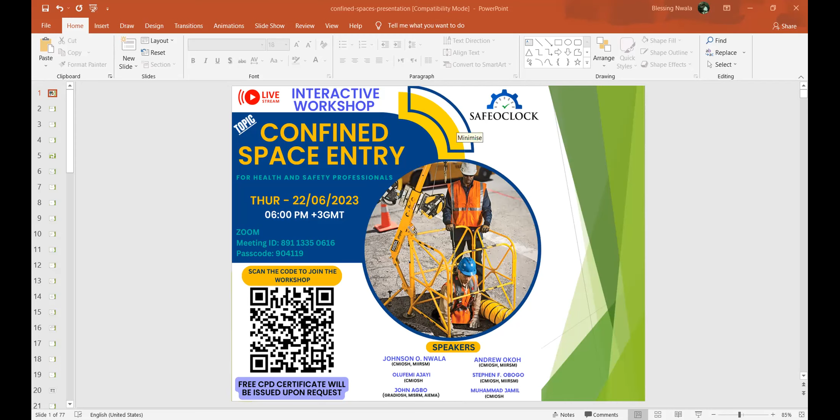All right, we are starting. I think everyone here knows me, my name is Johnson Nwala, and I'll be coordinating the discussion today. Like we all know, our topic today is confined space entry. So we'll be talking about confined space entry, and everyone will contribute.

I'll just introduce the topic in about 5 to 10 minutes, then I'll give the opportunity for others to contribute and give their own knowledge or ask questions so that we all learn together. So it's not a forum where someone knows it all. Nobody knows it all, so that is why we are here today.

All right, so confined space entry. Different people have different definitions for this, but majorly we have 3 major criteria for identifying a space as confined space. One is that it's large enough or configured for an employee to enter, and it has limited opening for entry and exit, and is not designed for continuous occupancy, meaning it's not designed for somebody to stay there for a long time. So these are the major criteria for defining a confined space.

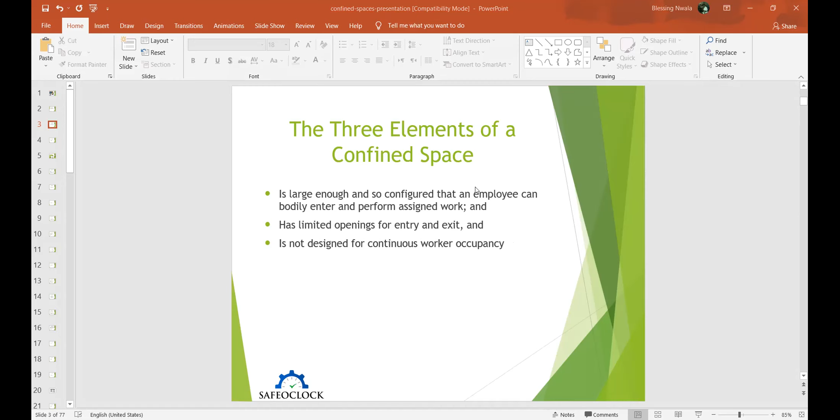All right, these are typical examples of a confined space: boilers, furnace, pipe, manhole, sewage, septic tanks, trenches. So these are all examples. Depending on the industry where you work, you will have a lot of examples and different scenarios. Those in the construction industry will be more conversant with manholes, you'll be more conversant with shafts. So these are examples of confined space.

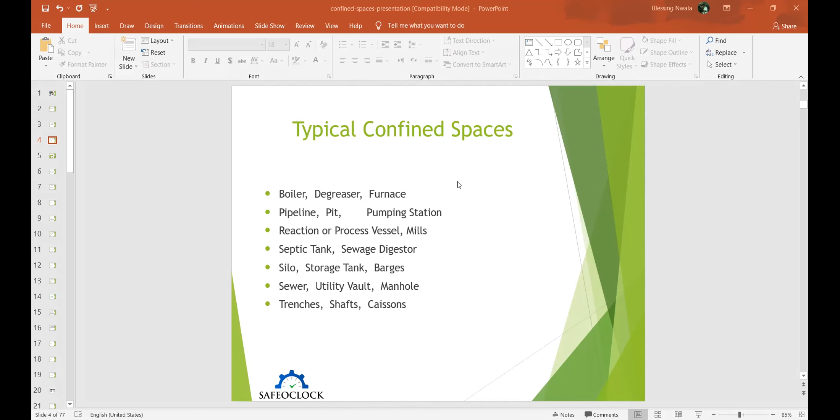If it has limited access to entry, it's not designed to stay for a long time, and the exit and entries are limited, you can classify it as confined space. Now, in categorizing confined space, I hope you can see my screen, right? Yes, yes, all right.

So in categorizing confined space into permit required or non-permit required confined space, you have to take note if the space is large enough to enter, there is limited or restricted entry, and if that space is not designed for continuous worker occupancy, then it's a confined space.

Now, for you to determine if a permit is required, either of these or all these criteria should be available. Like if the environment is hazardous, if there is hazardous atmosphere, if there is possibility of engulfment, there are configuration hazards, like there could be overflow or there could be drowning, and there are other recognized hazards, like oxygen deficiency or over-enrichment. So if these hazards are present, then permit to work is required, so it's a permit confined space, okay.

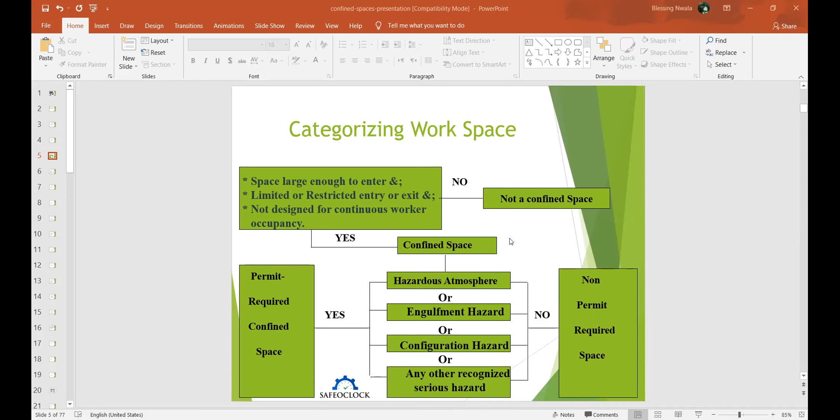We can hear from you and know how you implement permit to work in a confined space. All right, so what makes a confined space limited access?

If the opening is like 18 inches in diameter, or if there is difficulty of entry with self-contained breathing apparatus. Also, if it's very difficult for you to remove people from the confined space, maybe in the event of emergency, if it's difficult to remove people, then you know that there is limited entry, it's a limited entry space.

If there is difficulty for people to bend, somebody working inside there, if it's difficult for him to bend down to do his work, then there is limited exit and entry. So these are checks, criteria that you can use to check if this space has limited opening, if it has limited entry or exit.

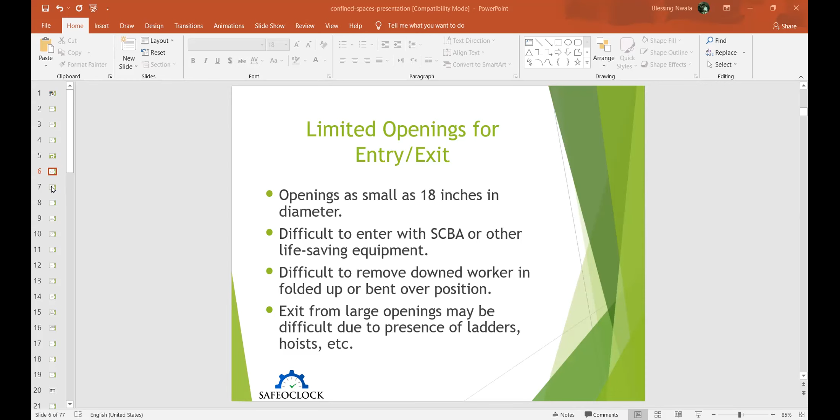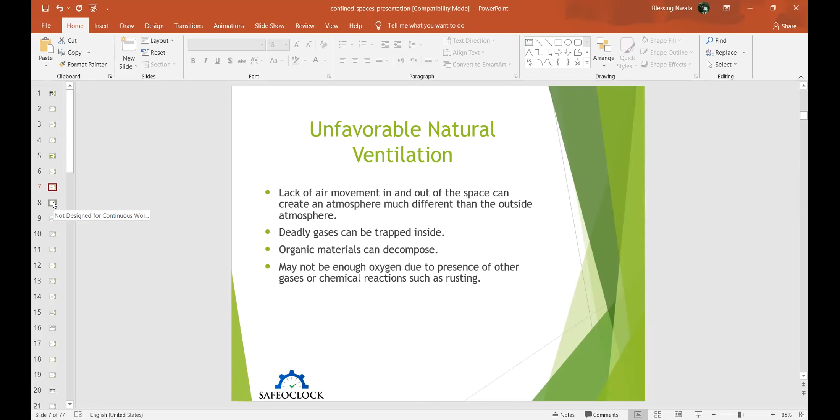How do you now check if the environment is unfavorable? If there is lack of air movement and if there are decomposed organic materials, you can say that this is an unfavorable environment. So what we are looking at now are checks, points that you look at to conclude if this confined space requires a permit to enter.

How do you now confirm if the place is not designed for continuous occupancy? If there is equipment stored inside that location, if the location is meant for repair or maintenance activity, then you know it's not designed for continuous occupancy. It's for temporary activities, just for maintenance. There is equipment stored there, and it's used for storing materials, maybe it's a tank. So it simply means it's not designed for human continuous occupancy, so it's a confined space and it requires a permit to enter. These are the points that you use to check.

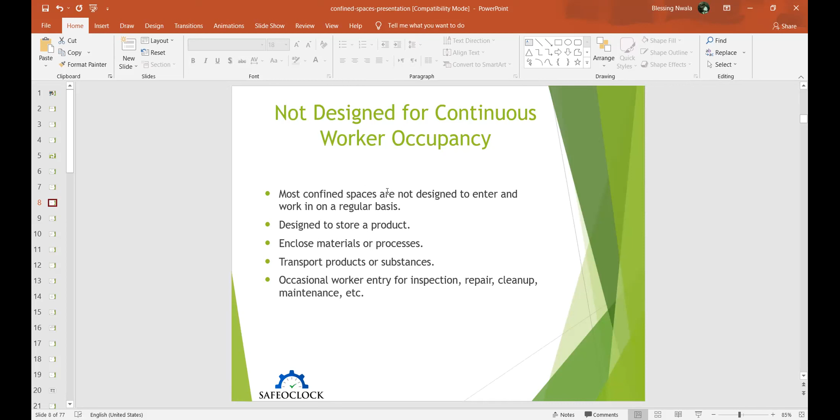Another point you use to check is if there are dangerous combinations, like if there is presence of all the characteristics of a confined space, and if there is possibility of complication during rescue operation. If the activity going on there involves welding, hot work, or use of gases or hazardous substances, then you know the environment is dangerous. There's a dangerous combination, so there is need for a permit to work.

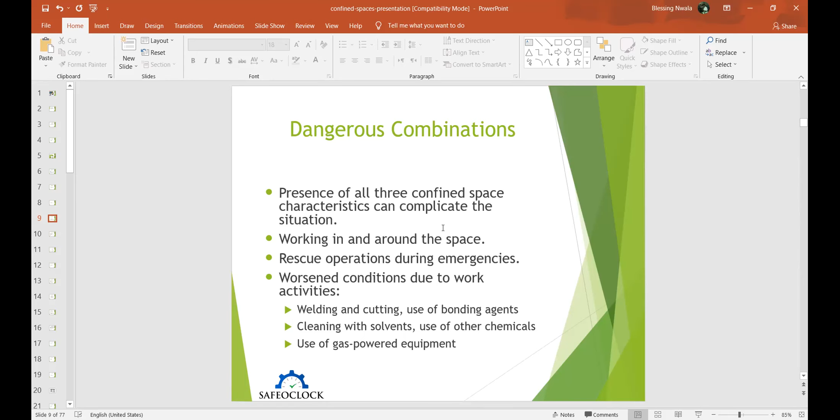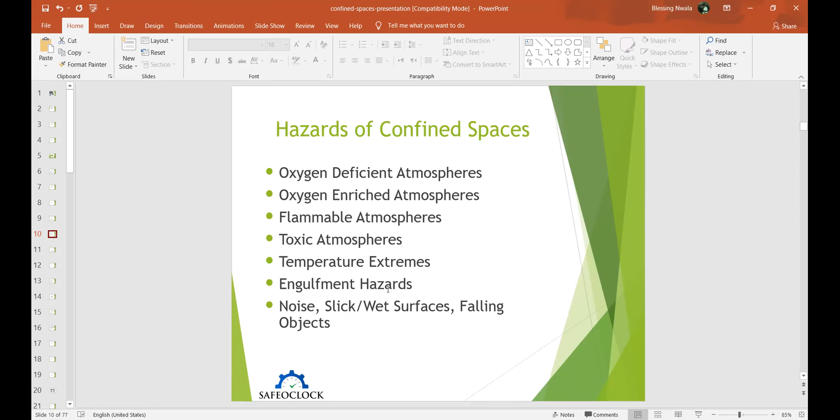These are some hazards that we'll find in confined spaces: oxygen deficiency, oxygen enrichment, flammable atmosphere, toxic atmosphere, extreme temperatures, either extreme cold or extreme hot, engulfment hazards, and noise.

What do we mean by oxygen deficient environment? If inside the confined space the oxygen is below 19.5%, then we know that environment is deficient of oxygen. So it's hazardous, it's a confined space and it's a hazardous environment.

If the oxygen level is above 21%, of course you are going to do gas testing, so we'll come to that. But if you do your monitoring, your gas testing, and you find out that the oxygen level is above 21%, then it means that confined space is oxygen enriched. It simply means the oxygen level is very high and there's possibility of fire outbreak inside there.

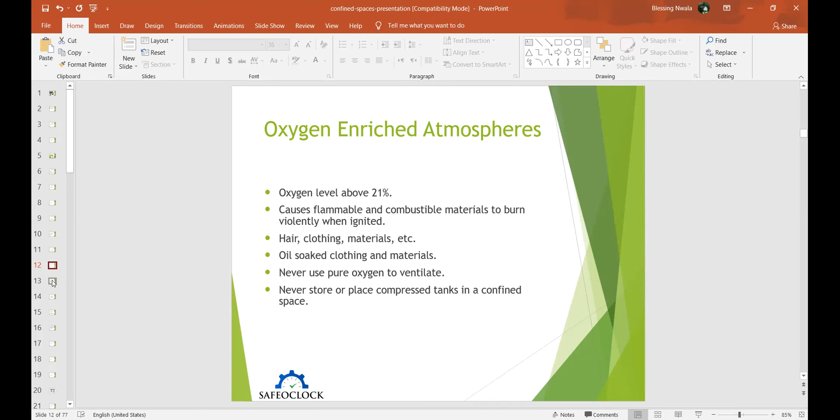Now, flammable atmosphere: if there is presence of flammable gases, if there is smoking, if there are welding operations going on inside there, then it's a flammable atmosphere.

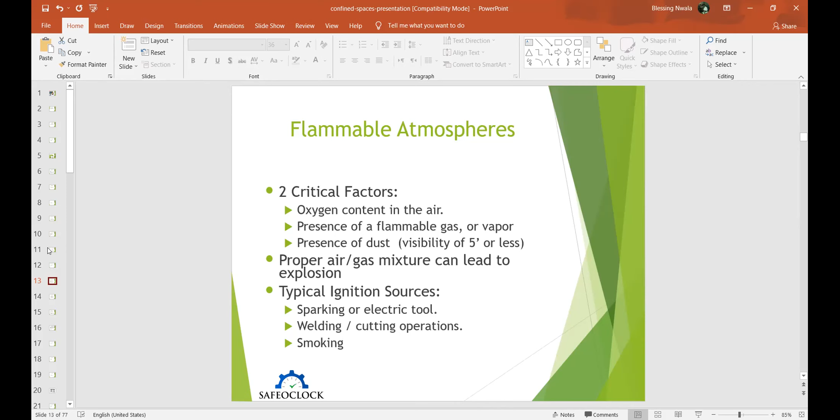Toxic atmosphere: if gases are released, if there are decomposed materials, these are all toxic atmosphere, and adequate control measures should be in place.

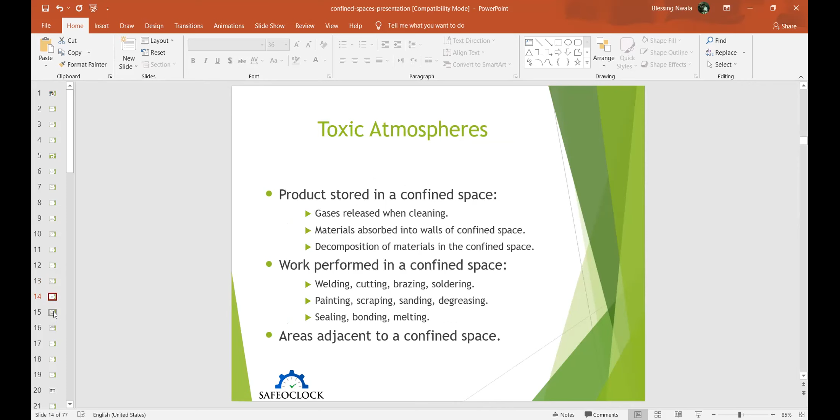If there is a presence of hydrogen sulfide, which comes from decomposed human waste and smells like a rotten egg, there is possibility of no warning at high concentration. So if hydrogen sulfide is present in the confined space, it's a hazardous atmosphere.

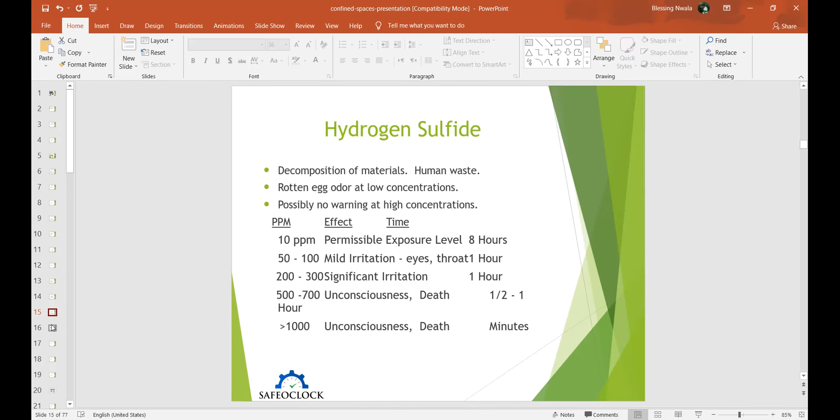Carbon monoxide: if carbon monoxide is available in the confined space, then it's very, very hazardous.

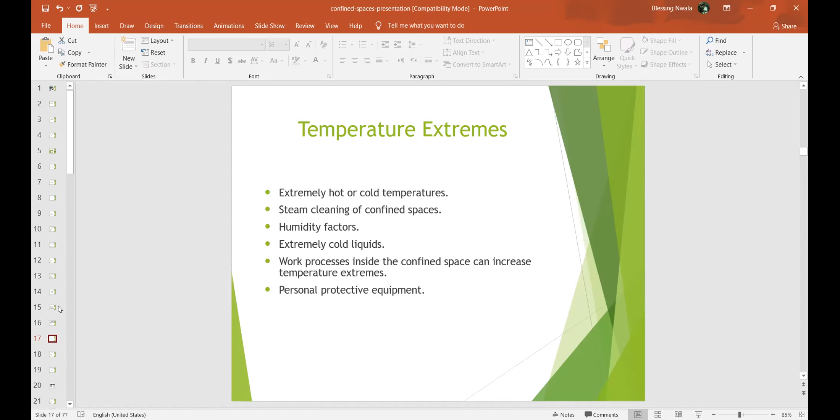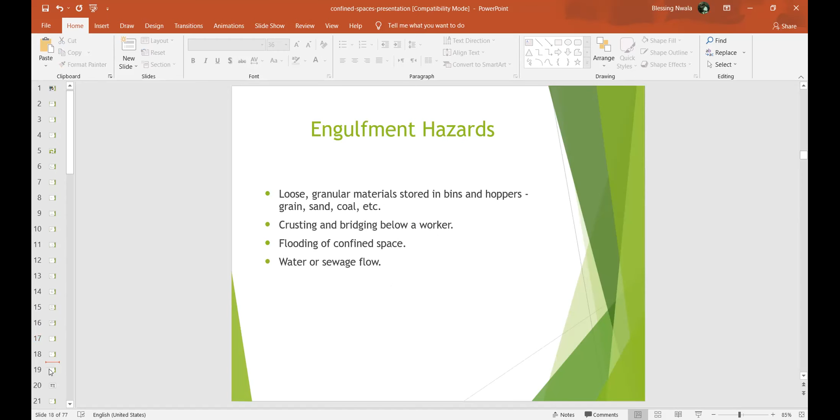We talked about extreme temperature before. Engulfment hazards: if there are loose soils, or maybe there is a possibility of flooding, or there is a sewage or sewer flow, then that is an engulfment hazard in confined space. Noise, falling objects, these are all hazards in confined space.

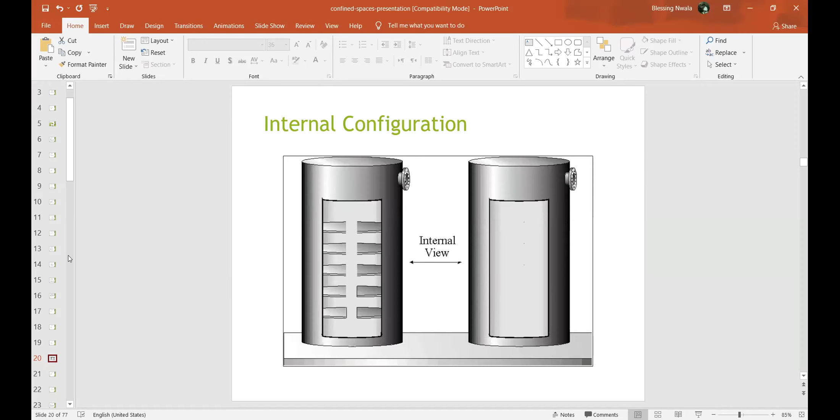What you see on your screen is a typical example of a confined space where you see there is limited space to enter and there is limited exit.

Before you start any activity in the confined space, there must be testing. You must test the environment, and testing must be done by a competent person, an authorized gas tester, who conducts the testing in the confined space. While testing the confined space, he must test the top, the middle, and the bottom of the confined space.

The reason is different gases settle at different levels. Methane is lighter than air, so you are likely to see it at the top. Carbon monoxide is at the same level as the air. Hydrogen sulfide is heavier than air, so you are likely to see it at the bottom.

While conducting gas testing, the authorized person must conduct the gas testing properly. If not, he might conclude that the confined space is safe, whereas at some point it becomes unsafe. That is why in most cases they use the tube type, inserted in the confined space, which gets you the reading at the top level, the middle level, and the bottom level, so that you'll be able to conclude that the entire levels of the confined space is safe before entrance.

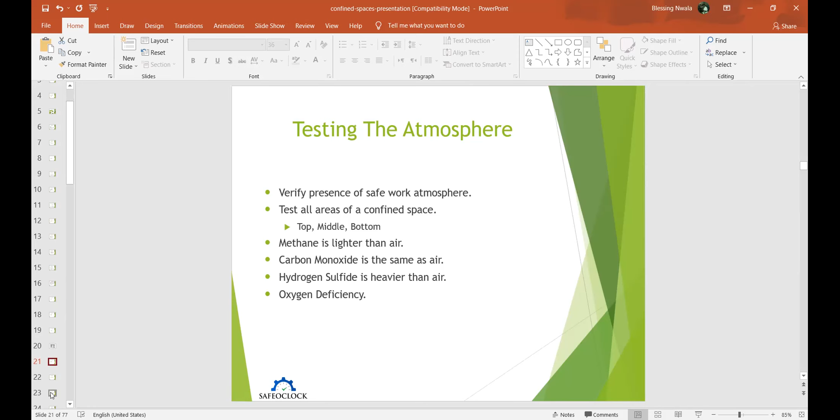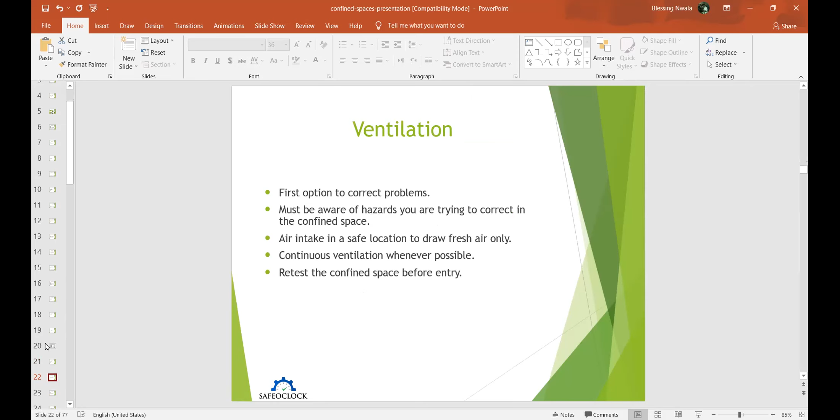Ventilation. Confined space must be properly ventilated. If there is poor ventilation in the confined space, then it's not safe to enter. Air intake must be properly drawn, fresh air should be sent to the confined space, and another gas test should be done after ventilation to confirm adequate ventilation before entering.

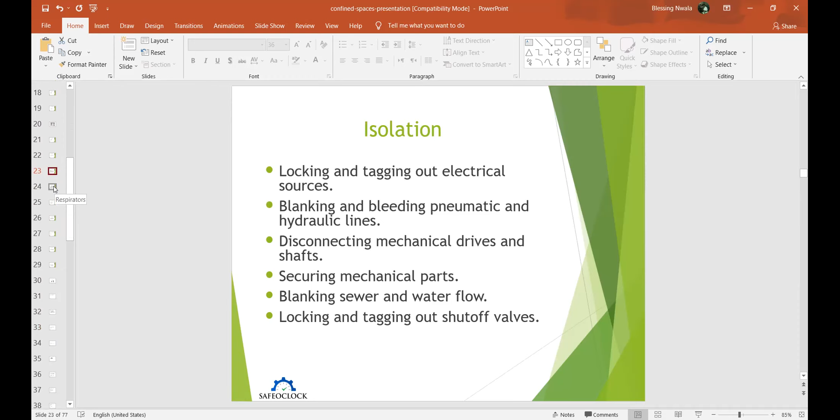Isolation. Before entering a confined space, all energy sources should be properly isolated. Last week we discussed lockout tagout, so there should be proper isolation, locking and tagging of equipment and energy sources in a confined space before entry.

Respirators must be used in confined spaces where there is a possibility of hazardous substances and contaminated air. We have air purifying respirators and air supplying respirators. Air purifying respirators filter dangerous substances from the air, while air supplying respirators supply breathing air from an uncontaminated tank.

Permit entry system. For every confined space, a permit to work should be raised. A permit raised cannot be used for a different confined space. Each confined space should have its own permit, a separate supervisor, and a hole watcher keeping watch and recording who enters and exits. The permit must record the people entering, the time, date, location, activity, and identified hazards with adequate control measures.

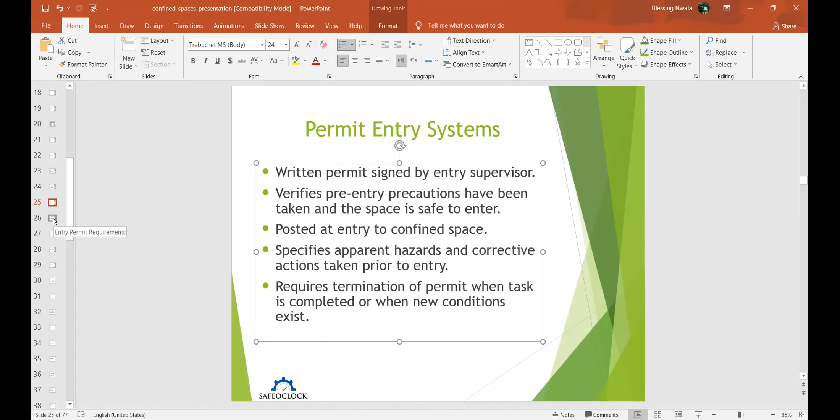We've talked about the entry requirements for permit to work for confined spaces. The people entering the confined space must be trained. The entrant must be trained, the authorized gas tester must be trained and competent, and the confined space supervisor must be trained and competent. So there are different levels of training for the people involved.

Standby or rescue. I've talked about a manhole watcher. He must be present from the beginning till the end of the activity, watching the hole and keeping communication with the people inside the confined space to ensure they are working safely and are okay.

Confined space rescue training. If there is a confined space in the workplace and people are working inside it, there is a need for a confined space rescue team. They should be authorized and trained, and they need to have all the necessary equipment to conduct a safe rescue in the confined space.

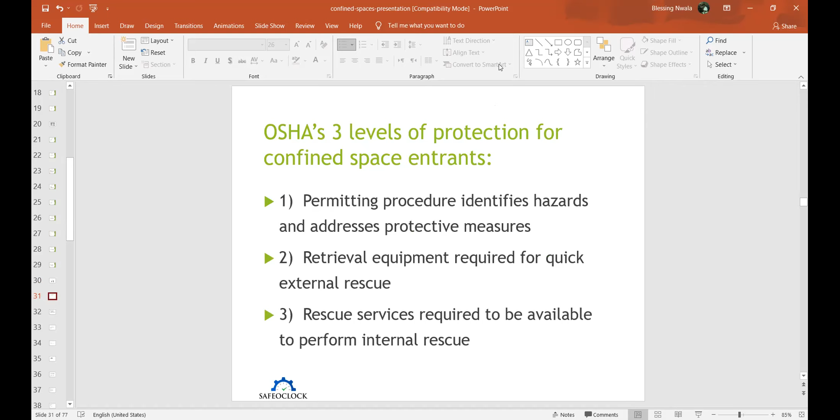Can you give me access to share my screen? I just have one or two, I just want to go through the slide. Yeah, I've given you access. Try to share. Okay.

For those that don't know me or are attending this workshop for the first time, I'm Stephen Francis by name. I'll start by saying Mr. Johnson has really said a lot about what confined space is all about. But I decided to bring in my slide because it's full of graphics, so that at least we could refresh our memory with what we know about a confined space. One basic thing we should know about confined space entry is to ensure safety.

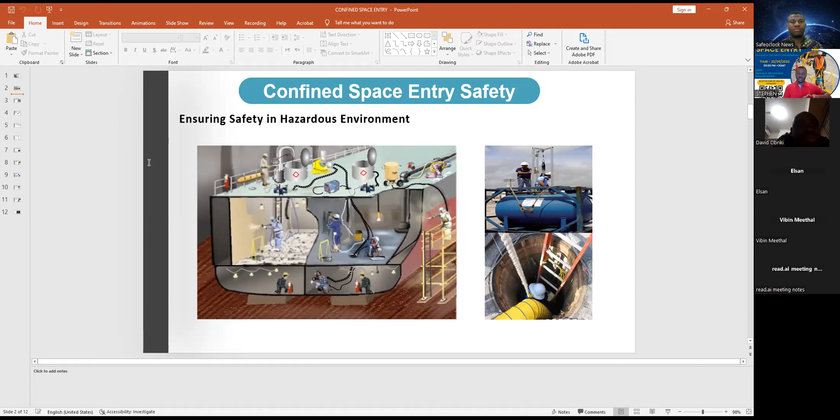A confined space environment is a hazardous environment, so our purpose as a professional is to ensure safety within such an operational environment. Confined spaces exist in different forms, just like Mr. Johnson earlier said. They can come in the form of a storage tank, crawl space, pipeline, silo, boiler, and so on and so forth, depending on the industry you work in. In construction, which most of us work in, you might find a shaft, a trench, or a manhole, and these are the basic common ones we find in construction.

But when you start going to the process industry, those managing the environmental area as well, you begin to see things like pipeline, tanks, furnace, boilers, and all that. So I think in this industry, confined space is a very critical area that people don't joke with. Everybody is designated to carry out certain functions in this area of confined space, but I know we might just ignore a lot of things in construction.

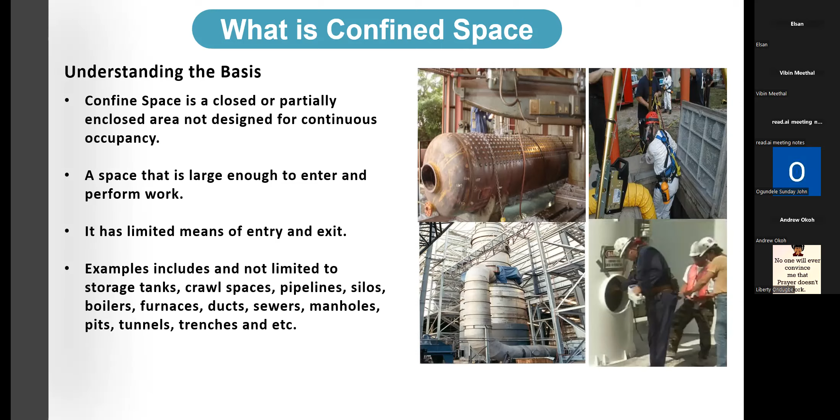Then when we look at recognizing confined space, like Mr. Johnson has said earlier, these are common things that we know. A confined space is associated with limited or restricted entry or exit points. And because of this limitation, there's a 99% tendency of poor ventilation. Because of how confined this environment is and what it contains, it can present a hazardous substance or condition. Also, these spaces have this configuration issue because naturally they are not designed for human occupancy, so you are likely to face all this kind of hazard.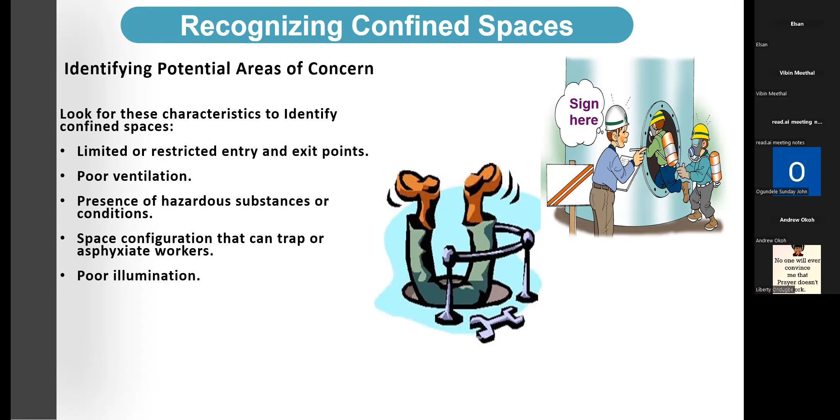And also one of the things you can use to recognize a confined space is that there's likely a 99% chance of poor illumination as well. So now, like he has rightly said, we have a series of hazards that could be present in the confined space.

So you can also have some kind of physical hazard, which could appear in the form of heat stress, and also noise, vibration, and hazard as a result of electrical equipment being present within the environment. Also, this limited access and egress into a confined space is a hazard on its own, so we should take note.

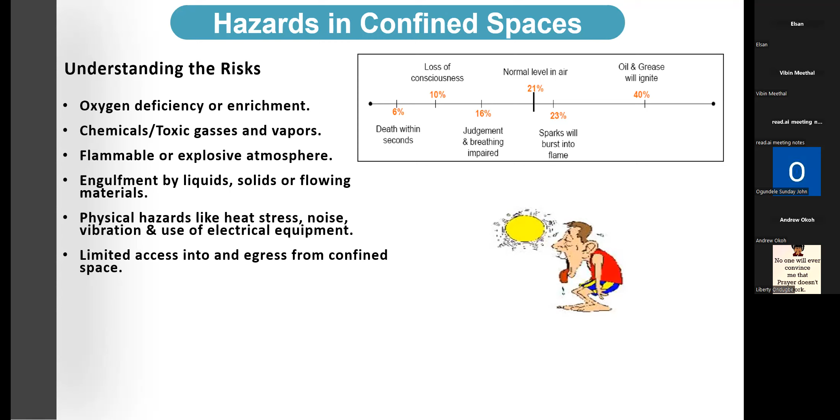Then above 21%, when we get towards 23%, any little thing that has to do with spark will trigger fire. And even at the level of 40%, just normal oil and grease will ignite. So these things we overlook are very critical issues when it comes to confined space.

Now I want to bring us to some basic procedures we should all be familiar with when it comes to confined space activity. The first step is that we have to carry out what we call evaluation. In that evaluation, we have to determine if this environment is actually a confined space, or like Mr. Johnson has said, whether this space requires a permit or is a non-permit required space. We also have to identify the hazard within such an environment and develop an entry plan.

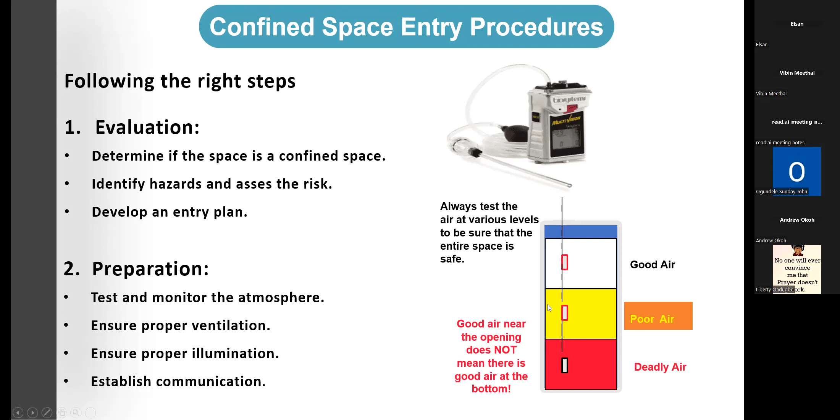So, you need to go down deep beneath the confined space to determine the level of oxygen and other gases that are available within the environment.

Another point of this entry procedure is to ensure implementing a confined space entry permit, which we have mentioned earlier. In some cases, you will need another form of permit, because in the confined space you might be carrying out hot work, cold work, or some other activity that requires an additional permit to take more precaution.

Communication is very important. You need to have a protocol for entry and exit, a confined space entry supervisor who is well-trained and competent, and also an attendant or hole watcher who is in charge of taking attendance of those who go in and enter a confined space, and communicating with those working within it, either by looking at them physically or through radio.

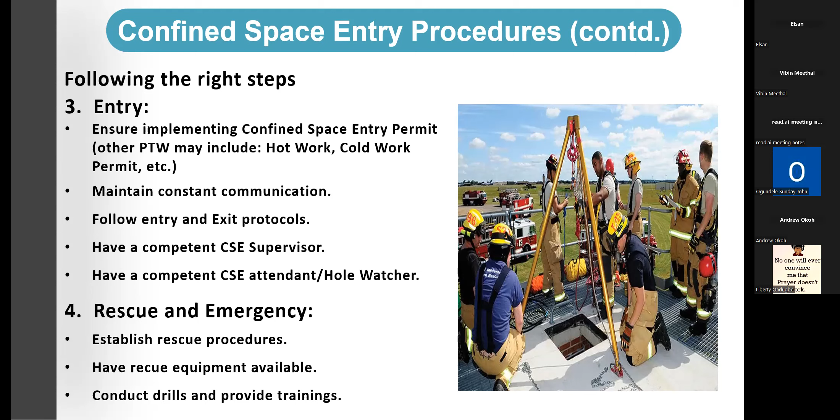One other important aspect to consider is that before you embark on any confined space activity, there must be a rescue and emergency procedure or plan established, along with the equipment available. Part of the training and education is that we need to conduct emergency drills for confined space activity, so workers who operate in such an environment will be familiar with it.

There are always safe practices we must carry along as professionals. We have to look at assigning a competent and trained supervisor and watcher, ensure they are adequately trained, implement the permit to work system, and monitor and maintain the rescue equipment.

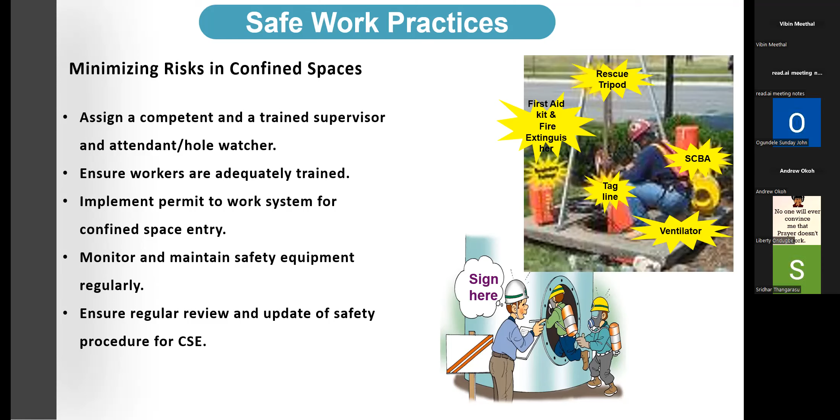These are very important, because if you don't maintain the equipment and you want to use it for rescue, it's like you are doubling the hazard. So we also try to ensure that we review and update our safety procedures and general confined space procedures.

A lot of precaution must be taken, just as Mr. Johnson has said. There should be a lockout tagout procedure for equipment in or near the confined space. We ensure adequate lighting and signage within the environment, and ensure we don't use tools that can create sparks, making use of non-sparking tools instead.

So we have to secure or guard the opening, because every confined space has an opening, like in the picture here. Sometimes you have to do a kind of barricade to make people aware of the environment they are working in.

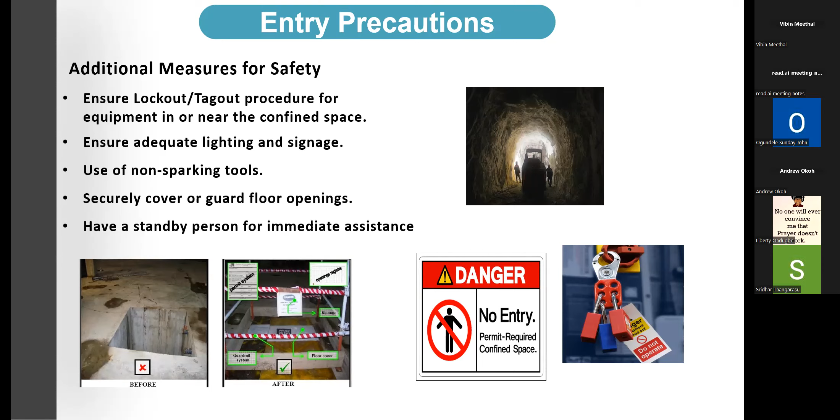Training and education is very, very important. If you don't train your workers and staff who are working within such an environment, then we are creating, should I say, a death sentence for those workers. So it is advisable, since we know how important training could be when it comes to safety.

They are very, very important. They should have the knowledge of entering into a confined space, and the knowledge of emergency procedure in case of emergency. Also, training about how to carry out drills is very important.

Communication, as I've said, if you don't have open communication, there's going to be a hazardous environment. So when we look at all these things, we can conclude that confined space work requires careful planning and adherence to safety procedures and protocol, and understanding confined space entry hazards and implementing proper precautions is a very crucial and important aspect within such an environment.

Training and communication are things we don't just joke with. We must be able to implement them to have a successful confined space work activity without having an injury or an accident. Thank you very much.

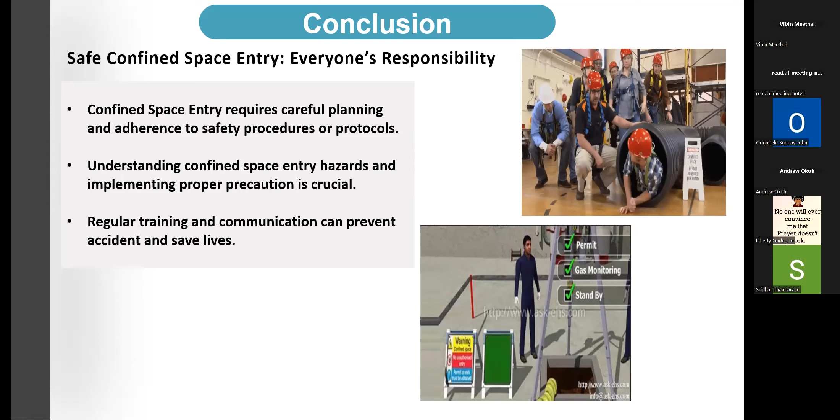Hello? Yes, thank you very much, Mr. Steve. We appreciate your contribution. Sandro, are you there? Yes, good evening, sirs. I'm here with you.

Okay, are you ready? Yes, let me just contribute a little, because you guys have said it all. It's really amazing, thank you for the wonderful presentation. What I will just contribute is the implementation aspect.

The implementation aspect of the confined space is the duty of the safety profession, because we are at the center of the whole implementation and enforcing the rules. So one of the challenges that we face regarding confined spaces, actually...

Sometimes workers take shortcuts. Sometimes you may not be aware that they are going to work in the confined space, and when it goes wrong, they come after health and safety, because they believe you are supposed to know that workers are working even without you being informed. So these are our common experiences.